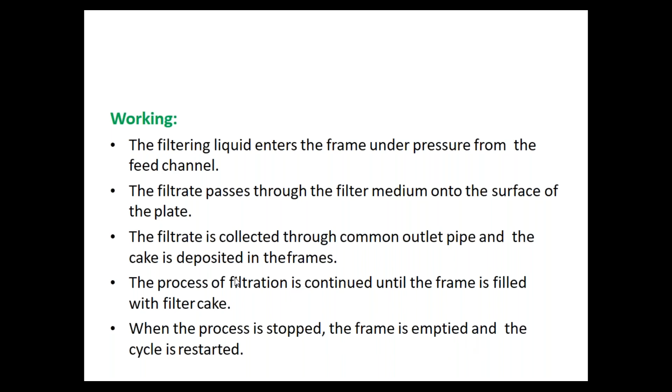So these two have been again connected to a common outlet which will come out as a single outlet for the removal of the filtrate as such. Single pipe for the removal of the filtrate. Okay. Otherwise, say now it has to be washed. So this will come under pressure. So because of the pressure, it will help in moving of the liquid further.

Okay, because of this, whatever filtration takes place, whatever filter cake is there, that is the solid so formed because of the suspension, the solids which are present, they get deposited over the surface of these filter paper or the filter cloth. Once the filtration is over, we are going to remove it and we are going to clean the filter cake. Okay, and we can reuse the assembly again.

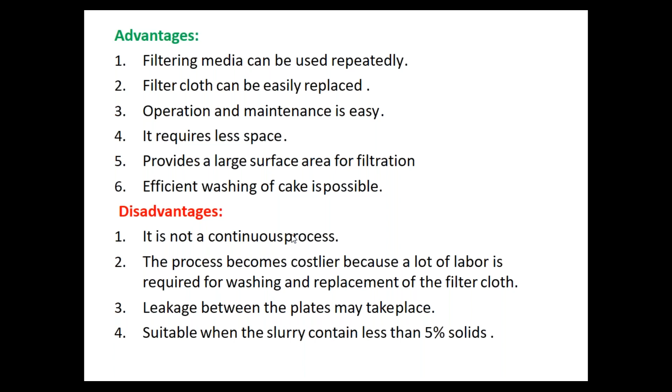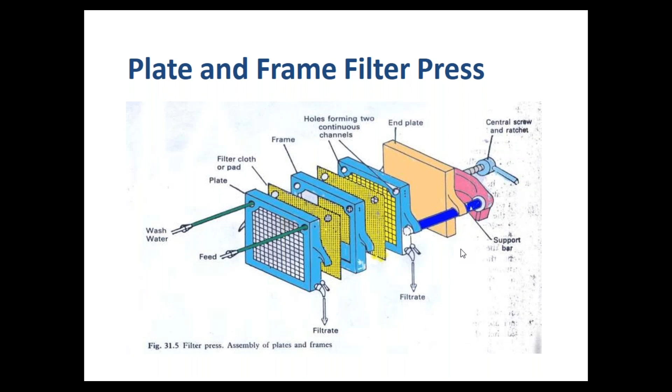Any doubt? No, ma'am. Understood? No, ma'am. Yes, ma'am. Understood means no, ma'am? Or have you understood? Understood, ma'am. Sure? Yes, ma'am. You want repetition or understood? Understood, ma'am. Okay.

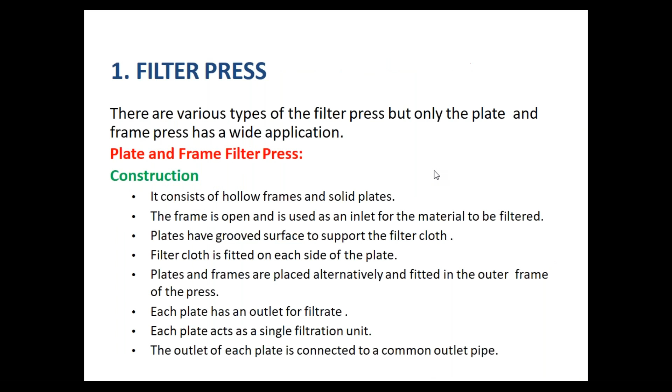We'll go to the next assembly. So that is sintered filter. Next one is known as sintered filter. So this sintered filter, it's made up of borosilicate glass. Okay, I think sintered filter I had showed last class. So this is sintered filter. So this sintered filter is made up of borosilicate glass. Borosilicate glass is finely powdered. They are sieved and particles of desired size are separated.

Followed by that, they're going to pack it into a disc mold and it is heated to a temperature. Because of the increased temperature, there is adhesion that takes place between these particles. So because of the adhesion between particles, they take up a shape. So the disc is then fused to a funnel of a suitable shape and size. It is the same thing which I showed you. So you will have this,

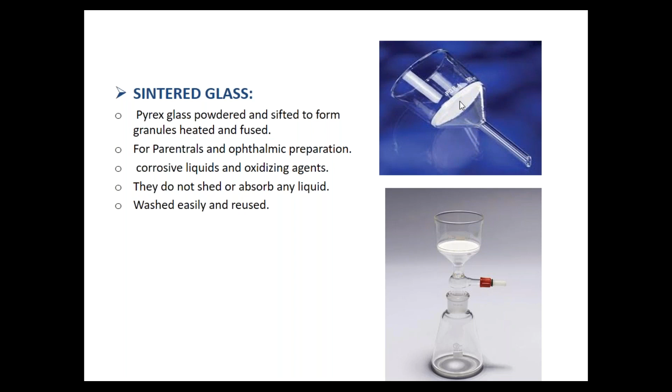see, this is nothing but the filter I was talking about. This is nothing but the sintered glass. Because of the temperature, it is permanently fixed. You cannot remove it as such. Fusion takes place because of the increased temperature in case of this sintered filter. So the disc is then fused into a funnel of a suitable shape and size.

The funnel with the sintered filter is numbered according to the pore size. Based on how many micrometers the pore size is, they have been numbered. Say the pore size is 2 micron, then the funnel is numbered as 2. If it is 3 micrometer, it's numbered as 3. So the funnel is numbered according to the pore size of the filter paper, I mean, not filter paper, sintered filter.

The filtration is carried out under reduced pressure. They are also available in stainless steel, but not preferred as they are more liable to attack by the solutions. The borosilicate ones I showed you are more preferred. Even though they are susceptible to breakage, they sustain better than the others. With stainless steel, some corrosive solutions can corrode it if the solution is powerful. So for that reason, borosilicate sintered filters are most preferred.

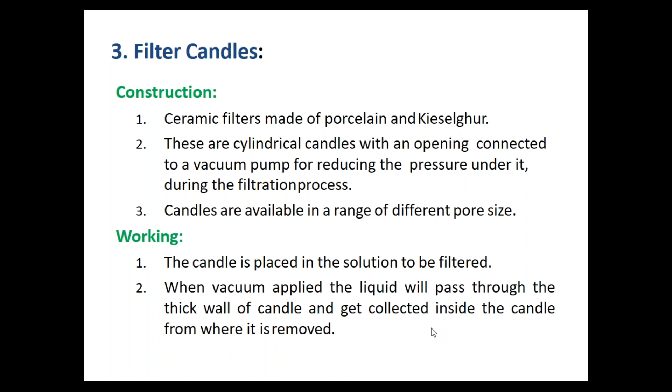So if you consider this, we are just keeping water here. This water will flow because the connection to a vacuum pump creates reduced pressure, due to which water starts flowing inside. It passes from outside to inside, and whatever particles are there get deposited inside the candle.

So there is an advantage and a disadvantage as well. The disadvantage is that filter candles get blocked with continuous use, because the water moves from outside to inside of the candle. There are chances of the materials blocking inside, since they don't come out, they stay inside these candles, and they can block the filter candles if used for a very long time.

This can be cleaned by scratching the external surface with a brush, or by passing water through the reverse direction. If filtration normally takes place from left to right, passing water from right to left gives a chance of cleaning out whatever deposits are there.

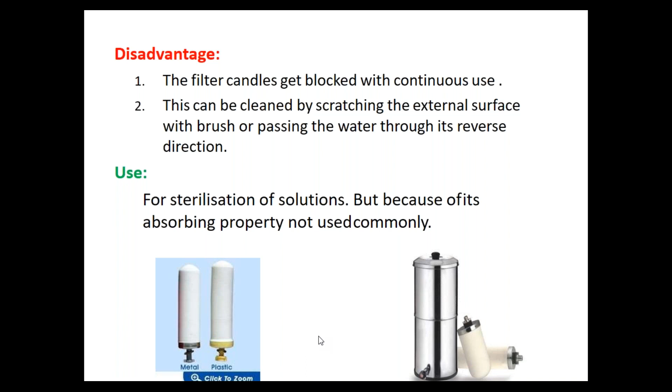It has advantage as well as disadvantage. Advantage, it is most effective in cleaning, especially when it comes to water filters, so they are most preferred. But when it comes to other materials, because of its absorbing capacity, we are limiting its use. That's about candle filters.

Lastly, meta filters. Meta filters look quite complicated. The meta filter construction is a little complicated, because they are made up of metallic material. Metal rings and all are present in this.

Metafilters are the filters used to separate very fine sized particles from the liquid or solid suspension. Whatever we talked about until now could be in general any sort of suspensions. Metafiltration is desired whenever we have to separate very fine particles from the suspension.

In metafiltration, the pore size of the filter material will be very less, which is why it will be able to retain fine particles. Fine particles, just imagine, like talcum powder, so very small sized particles.

Moving on to construction of metafilter. It consists of a series of metal rings, one after the other. It contains a metal grooved drainage rod, a drainage rod which is grooved.

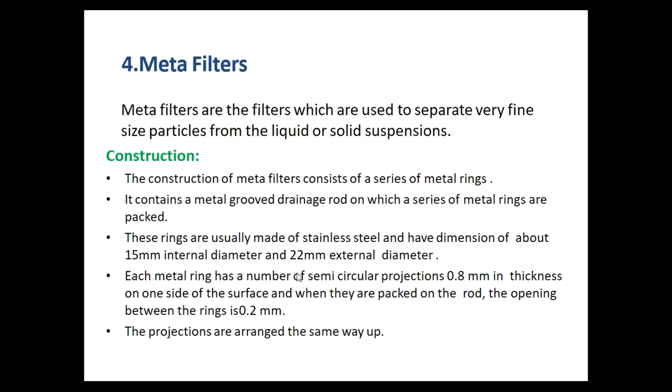So there is a space in between these two. If you observe, even though they are closely packed, there is a distance of almost about 0.2 millimeter. So a 0.2 millimeter opening will be present between each ring, because of the grooves present as well as the projections.

Okay, so how does it take place? The entire assembly is placed inside a pressure vessel containing the liquid to be filtered. When vacuum is applied, liquid will flow from outside to inside. The clear liquid is collected into a receiver from the top, and the pack of rings acts as a base on which the true filter medium is supported.

So in general, filtration takes place like this. This is kept inside a vacuum assembly wherein the liquid starts flowing in and it gets filtered, and the filter cake gets deposited, and we get the filtrate as well. Efficient filtration takes place because it has to pass through these grooves, and effective filtration takes place because of the metal filter.

So what are the advantages? It possesses considerable strength. Why? Because it is metallic in nature, so they bear greater strength and hence can withstand high pressure. So even though we are going to keep it inside a pressure vessel, they'll be able to withstand high pressure. They are economical.

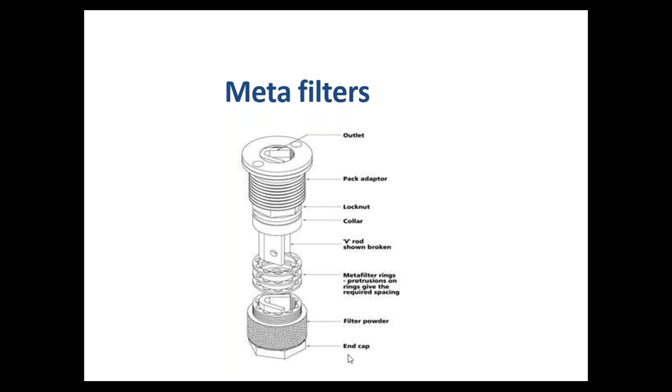Corrosive liquids can be filtered without any problem, unlike other equipments wherein corrosive liquids could not be used. So this is better whenever we are going for corrosive liquid filtration. Cake can be removed efficiently without any difficulty, as cake is deposited at the bottom, so it's easy for the removal of the cake.

What is the use? Used mostly for clarification of syrups, elixirs, and parenteral solutions. So in general, they are used for clearing, filtration, or clarification of syrups, elixirs, and parenteral solutions. Are you aware of what syrups, elixirs, and parenteral solutions are? Different dosage forms, whenever talked about.

What are syrups? What are elixirs? What are parenteral solutions? I guess parenteral solutions I myself have told you. What are syrups? What are elixirs? Anyone? What do you mean by syrups? Nobody knows, is it? At least answer, you know or you don't know. Ma'am, saturated solution of sucrose in purified water.

Okay, that's syrups. What are elixirs? Ma'am, elixirs are sweet aromatic preparations. Okay, how are they different from syrups then? Sweet, aromatic - even syrups will be sweet in nature as well as colored, aromatic. Colored? Even elixirs are syrups, usually colored. No, even syrups would be colored certain times, red colored, based on what flavor or color we are going to add. Ma'am, syrups are also colored. Yes.

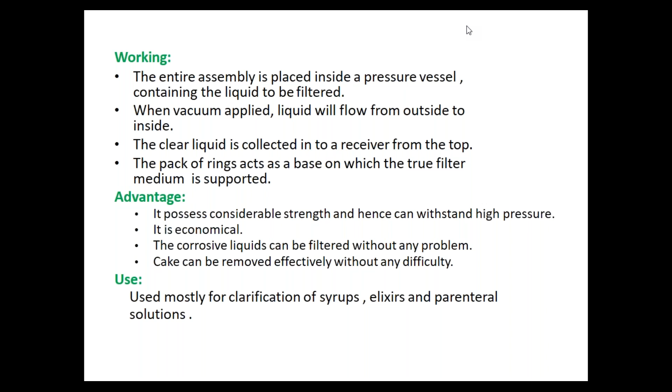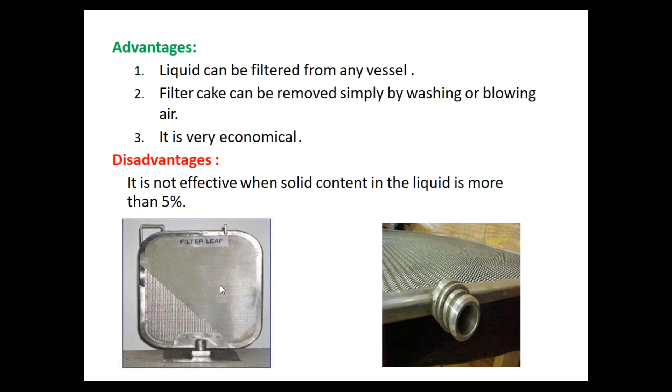This is not there in the syllabus. If anybody asks, you should know in general. This is easy for cleaning as well when compared to others. If you pass water through this, whatever solid content is there will come off easily. So this is filter leaf. I'm not going in depth because you should not get confused with the others which are actually in the syllabus.

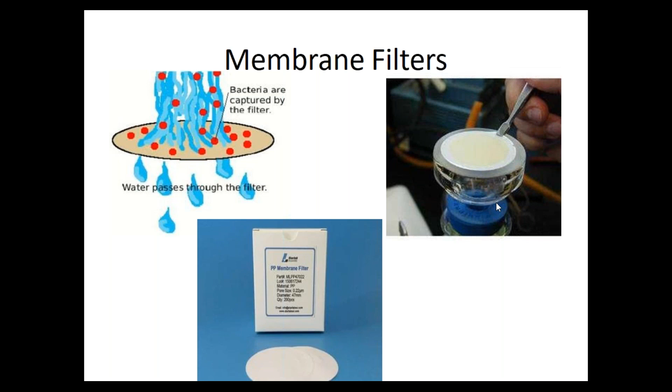Then is the membrane filters. This is what I talked about, the bacteria thing, especially parenteral ones. We apply pressure and go for filtration. Because of the increased pressure, the liquids are forced inside this membrane and get filtered. In general, this membrane filter size is up to 0.2 micrometer, hence it will be able to filter even the bacteria present. Most commonly, these are used for biological experiments as well as for parenteral preparations.

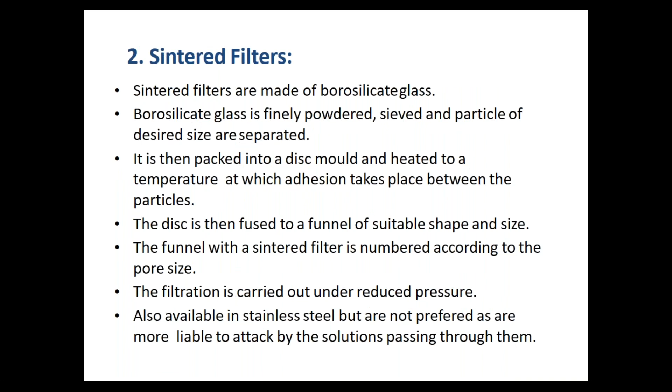That's all about equipments. Any doubt in any equipment or any topics? No, ma'am. Filtration and clarification: introduction, mechanism, how it takes place, the factors that affect the rate of filtration, different filter media, filter aids, and filtration equipment. So this will finish the filtration and clarification chapter. Any doubt, anyone? You can ask if you have any doubt.

Next class you will have a unit test on the same. It could be MCQ type, one word or a sentence, or it could be essay type also. Commonly, factors affecting rate of filtration is important. They ask about filter aids with example: what are filter aids, give examples. Then filtration equipment: they can ask one particular filtration equipment for 5 marks, meta filters or plate and frame, anything.

So each filtration equipment is important; 4 have been discussed. Each of these 4 could be asked for 5 marks. Filter aids could commonly be asked for 2 marks, like what are filter aids, give examples. Then filter media: as with filtration equipment, they can ask any one particular filter media to explain. Factors affecting rate of filtration is for 5 marks, so you have to explain the different factors.

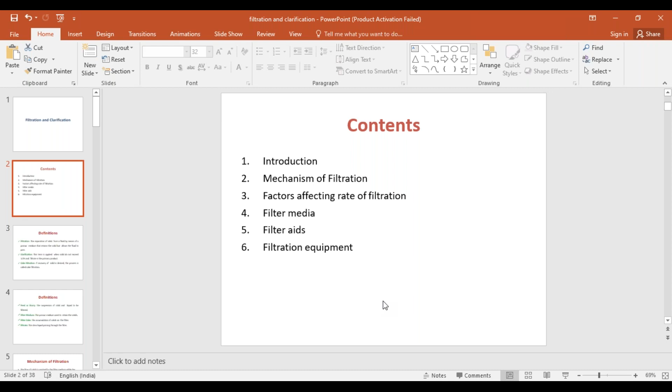Mechanism of filtration could be any of the two. Mechanism of filtration along with factors affecting rate of filtration can be asked for 10 marks: define filtration, explain the mechanism of filtration along with different factors affecting rate of filtration. This is about filtration and clarification. Is it clear? Any doubt? Yes, ma'am.